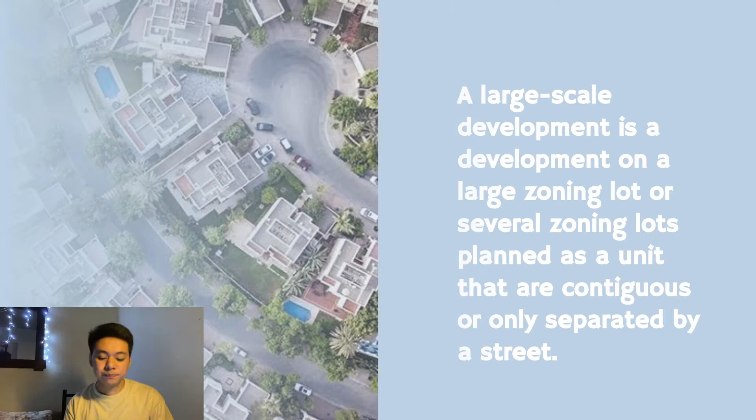Next, architects can be tasked with providing low-cost, durable housing options to people of the lowest income groups, so that slum areas can be redeveloped, keeping the genuine interest of existing occupants in mind, and not based on decrees issued by city authorities.

This means that as an architect, we are not just bound to create beautiful sceneries or greeneries, because we must also consider those people who are vulnerable in our community, such as those who can't even afford to buy a decent house. So large-scale housing also considers those people who are vulnerable in our community.

First is remote areas converted into housing and place-making spots. So what does this mean? In each city, there are places that aren't congested—far away areas not near the central district. We need to utilize these spaces for potential large-scale housing and place-making spots for a new central area, since in a city there are a lot of dead spaces.

For example, here in Cagayan de Oro City, places like Canitoan, Taguanao, and Upper Lumbia are far from the centro but aren't that useful. These areas have lots of free space with potential to be developed, but people tend not to live there because it's too far, not accessible, or convenient for them.

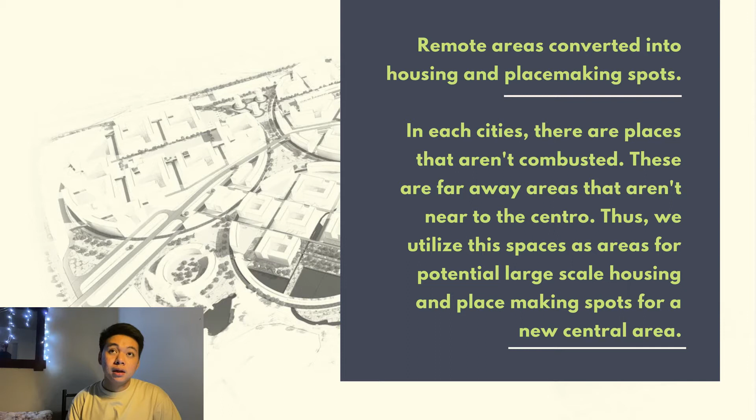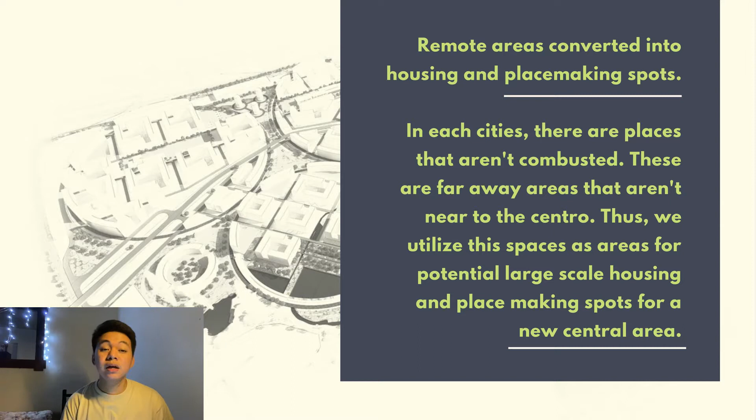So in this new strategy, we convert these areas into newer place-making spots. What are place-making spots? There is connectivity inside a community—we put commercial, residential, office, and business into one area so people don't just focus on one central point in the city, but scatter it all around. For example, in Lumbia, we put a shopping mall for people to invest in that place, because we get high density in one area here in Cagayan de Oro City.

Next is large-scale housing, new doors for new citizens through placemaking. What does this mean? An influx of population is now rising towards urban areas because of new opportunities. These large-scale areas might be the answer to a new style of living. In a large-scale community, placemaking is applied for people to earn, play the economy, and trade, with an exchange of goods and cost within the small community, making it effective.

So what I said earlier is that we utilize these remote areas as new place-making hotspots and convert them into new central points of the city—not just for citizens to focus on the old central spot, but to scatter it around and gain new opportunities, for example a mall placed in Lumbia or Taguanao, so these dead spaces become useful since they have lots of potential for large-scale housing.

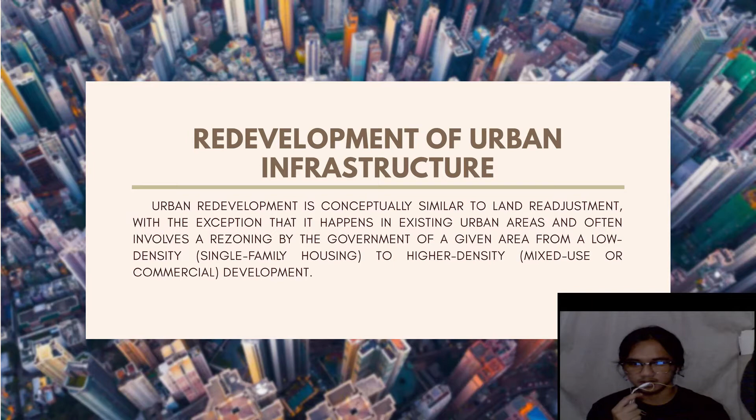Problem 2: Redevelopment of urban infrastructure. What is redevelopment of urban infrastructure? Urban redevelopment is conceptually similar to land readjustment, except it happens in existing urban areas and often involves rezoning by the government from low-density single-family housing to higher-density mixed-use or commercial development. Comprehensively systematized measures for urban redevelopment on a long-term basis aim to ensure fair guidance and planned promotion of redevelopment.

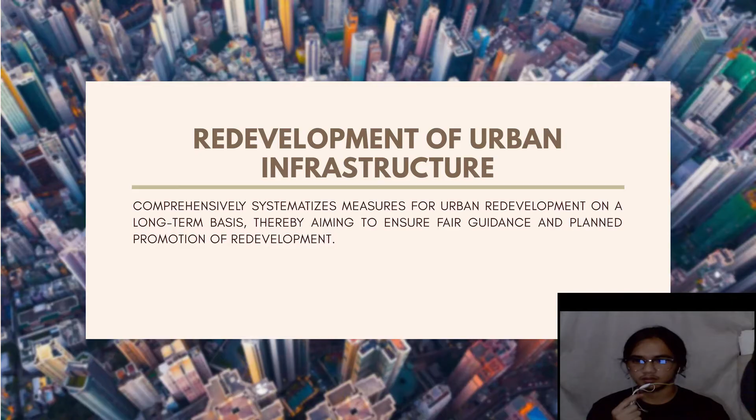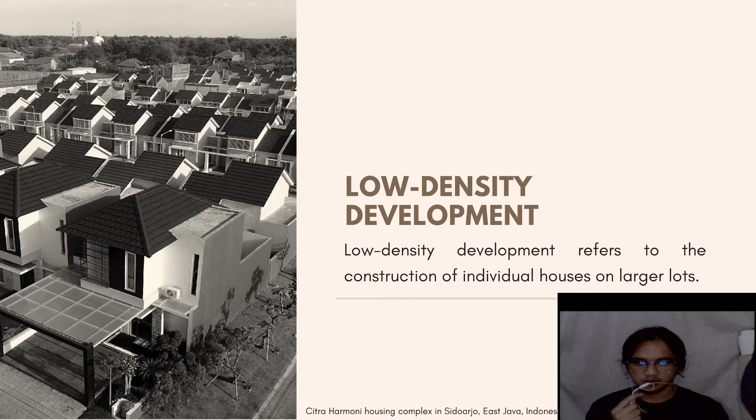What is low-density development? It refers to the construction of urban individual houses on larger lots. What is high-density development? It means new residential and commercial development at a density higher than typically found in an existing community. What is urban sprawl? It is the unrestricted growth in many urban areas of housing, commercial development, and roads over large expanses of land with little concern for urban planning.

What are urban infrastructures? Urban infrastructure can be envisioned as an integrated network of four major components: water infrastructure, such as water treatment plants; energy infrastructure, such as power plants that provide electricity; transportation infrastructure, such as airports and bus terminals; and the land use pattern or urban form, which are cities and other communities.

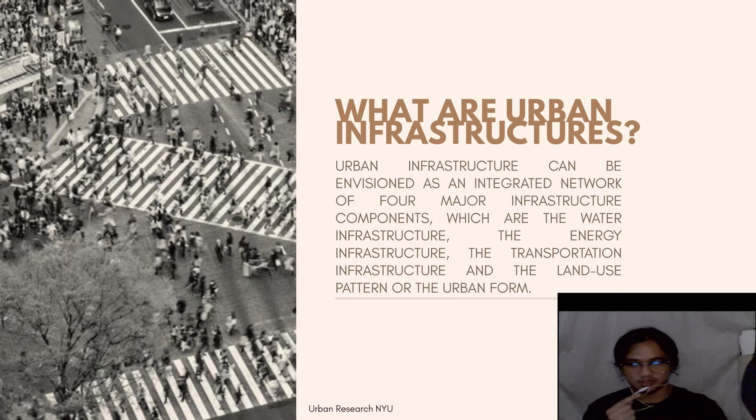Challenges with urban infrastructure: there are numerous challenges that rise within a community in urban areas, including population concentration and urban sprawl, water sanitation and transport, housing in slums, increase in crime, rising cost of living and wealth inequality, environmental pollution and degradation, and sustainable improvement of physical life quality.

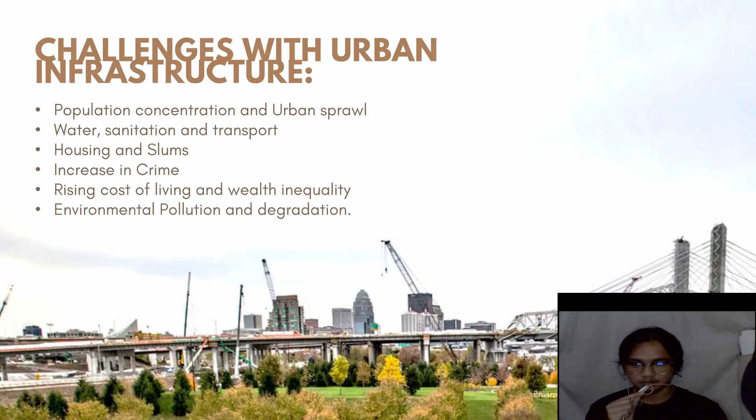The third problem that architects can solve or must solve is to reduce the large-scale production of greenhouse gases. I am Libon Francis Lian, and I'll be the one reporting.

So there are 5 key ways to reduce greenhouse gas emissions in building construction. First is to implement efficiency in material design. Second is to reuse building materials and components. Third is to enhance existing building utilizations. Fourth is to switch high-emission materials to sustainable timber. The last one is to use low-carbon cement.

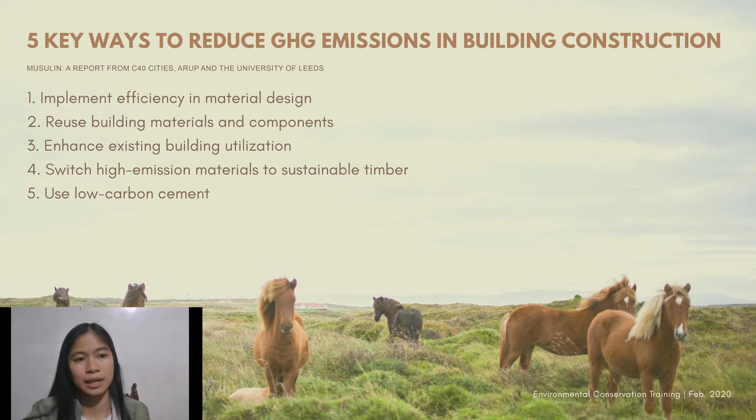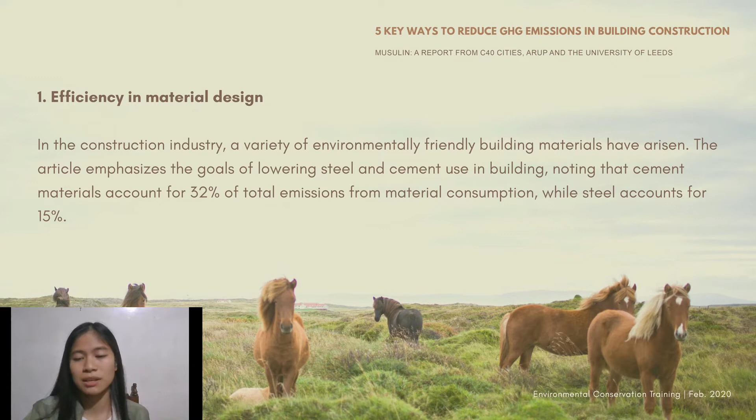Efficiency in material design. In the construction industry, a variety of environmentally friendly building materials have arisen. The article emphasizes the goals of lowering steel and cement used in building, noting that cement materials account for 32% of total emissions from material consumption, while steel accounts for 15%.

The reuse of building materials and components. The long-term climatic benefits of recycling and lowering construction components, like virgin steel, could reduce greenhouse gas emissions by 3% between 2017 up to 2050.

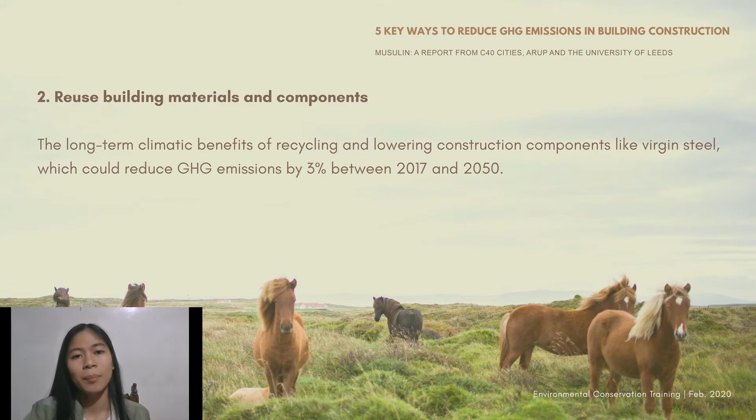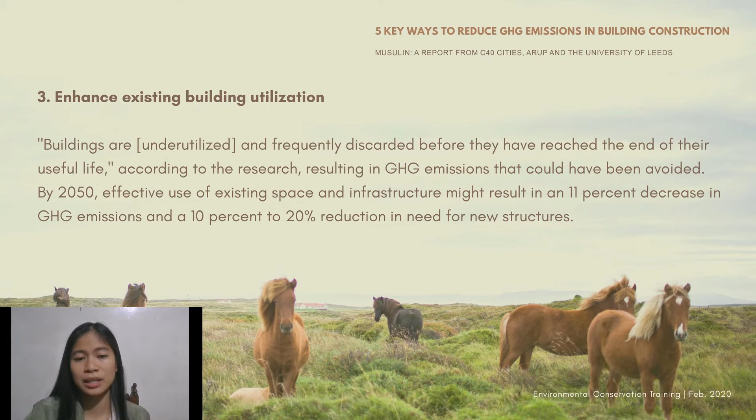The third one is to enhance existing building utilization. So, probably buildings are underutilized and frequently discarded before they have reached the end of their useful life. According to the research, this results in greenhouse gas emissions that could have been avoided. By 2050, effective use of existing space and infrastructure might result in an 11% decrease in greenhouse gas emissions, and a 10% to 20% reduction in need for new structures.

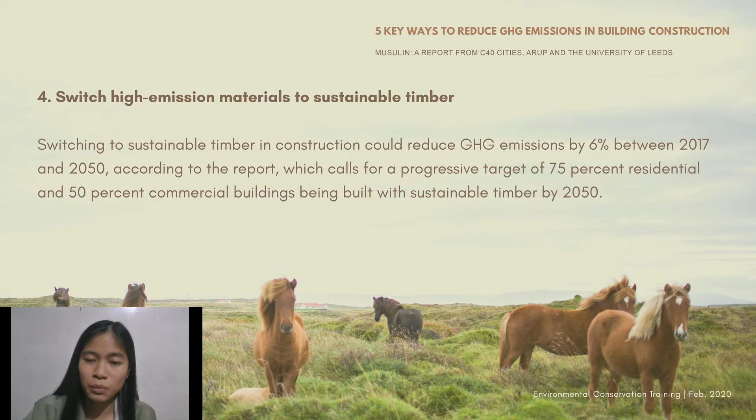The fourth one is to switch high-emission materials to sustainable timber. Switching to sustainable timber in construction could reduce GHG emissions by 6% between 2017 and 2050. According to the report, which calls for a progressive target of 75% residential and 50% commercial buildings being built with sustainable timber by 2050.

The last one is the usage of low-carbon cement. We know that concrete is one of the most carbon-intensive construction materials since the cement component demands tremendous heat and emits a significant amount of carbon dioxide. According to the paper, between 2017 and 2050, utilizing low-carbon alternatives to typical cement could reduce greenhouse gas emissions by 6%.

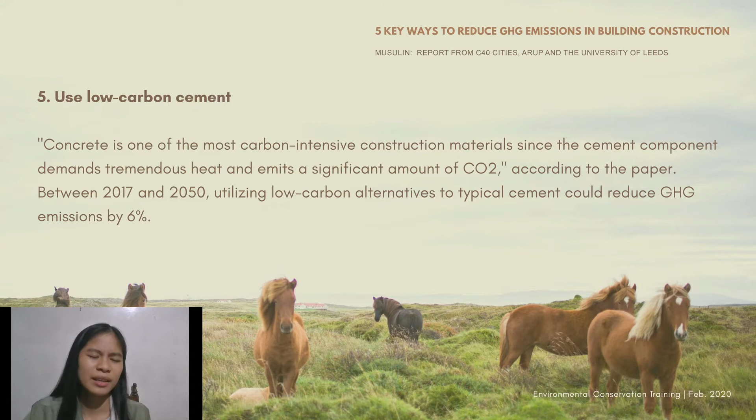So, one of the major contributors to global warming is artificial ventilation. Architects must take the lead in explaining to their clients the advantages of employing indigenous materials and also using vernacular design ideas in order for their buildings to have more favorable influence on the health of their users and also to the environment. So here's 8 tips to reduce your building carbon footprint.

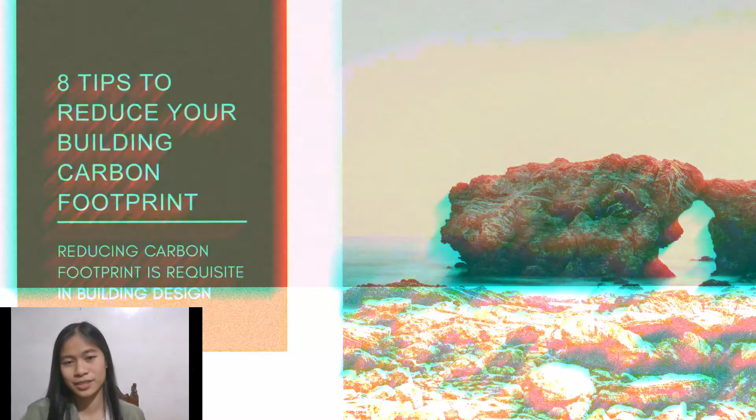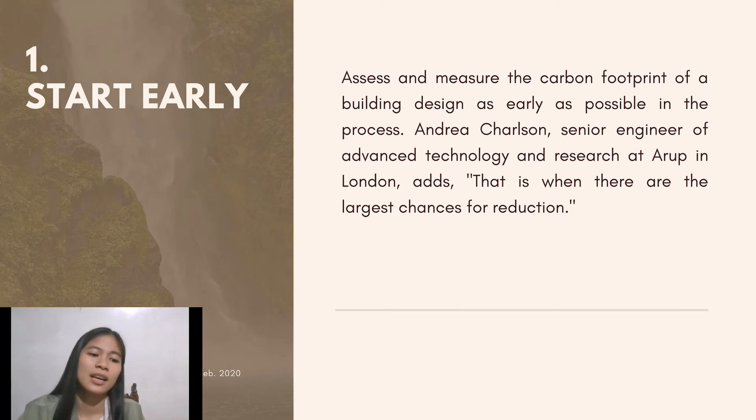Reducing carbon footprint is also requisite in building design. Number 1, start early. You must assess and measure the carbon footprint of your building design as early as possible in the process. As Andrea Charlson, Senior Engineer of Advanced Technology and Research at Arup in London, adds, that is when there are the largest chances of reduction for GHG emissions.

Second is HVAC. Schedule heating and cooling systems to turn on at predetermined times. Depending on the season, let the system run hotter or cooler during off hours. Sensors can be installed in a building to measure indoor air quality and determine how much ventilation is required. This will make your HVAC system use less power and natural gas. It will lower your energy bills and lower the building's carbon footprint.

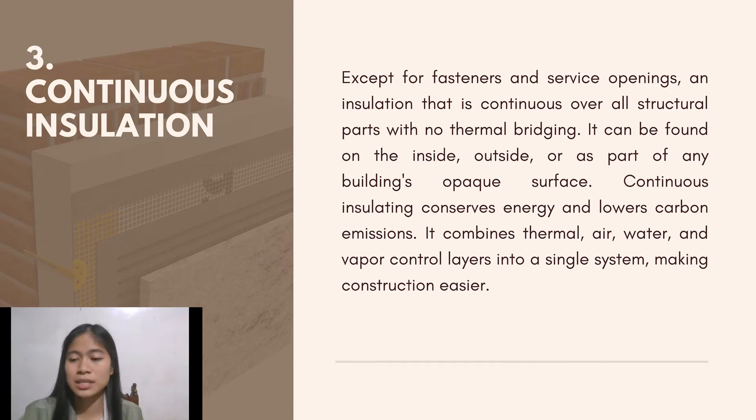Third is continuous insulation. Except for fasteners and service openings, it's an insulation that is continuous over all structural parts with no thermal bridging. It can be found on the inside, outside, or as part of any building's opaque surface. Continuous insulation conserves energy and lowers carbon emissions. It combines thermal, air, water, and vapor control layers into a single system, making construction easier.

Fourth is lighting. Make use of cutting-edge lighting and make the most of natural light. In a typical commercial facility, lighting accounts for over 40% of the energy consumed. Solar control window films can reduce carbon footprints by up to 30% by lowering energy costs. Open-plan offices and light-colored interior finishes aid in the distribution of daylight throughout the structure.

Increase natural light with high-performance curtain wall systems that include integrated sunshades and light shelves. Daylighting solutions that are properly implemented can minimize HVAC peak loads, resulting in lower mechanical equipment capacity and a lower carbon footprint.

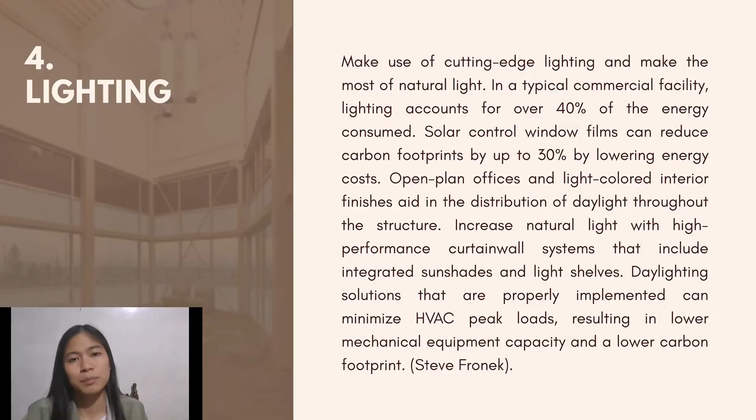6. Water usage. Water usage can be reduced by using water-saving fixtures and appliances. When compared to traditional toilets, specify high-efficiency toilets with lower average flush volumes. Rainwater can be used as a valuable water source. Design buildings to collect rainwater and generate outdoor spaces that are mostly irrigated by rain.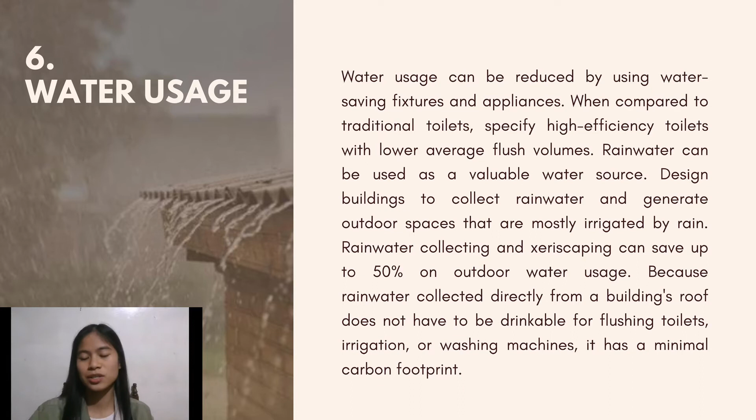Rainwater collecting and xeriscaping can save up to 50% on outdoor water usage. Because rainwater collected directly from a building's roof does not have to be drinkable for flushing toilets, irrigation, or washing machines, it has a minimal carbon footprint.

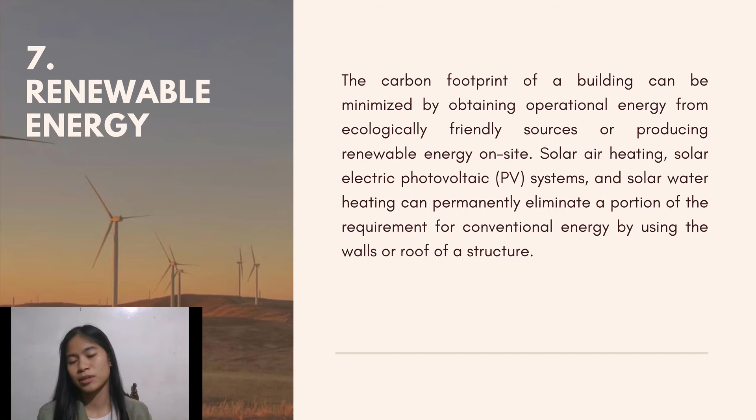Renewable energy: the carbon footprint of a building can be minimized by obtaining operational energy from ecologically friendly sources or producing renewable energy on site. Solar air heating, solar electric photovoltaic or PV systems, and solar water heating can permanently eliminate a portion of the requirement for conventional energy by using the walls or roof of a structure.

Location: the location of a building has an impact on its carbon footprint and the possibility for carbon buildup in the environment. Is the structure surrounded by a deteriorated or pristine ecosystem? Is it possible to repair an ecosystem while building a structure? The building's carbon footprint is also reduced by its location near public transportation.

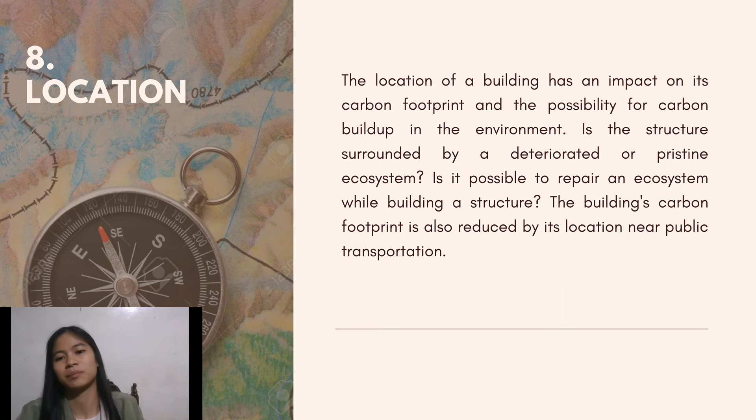So that would be all.

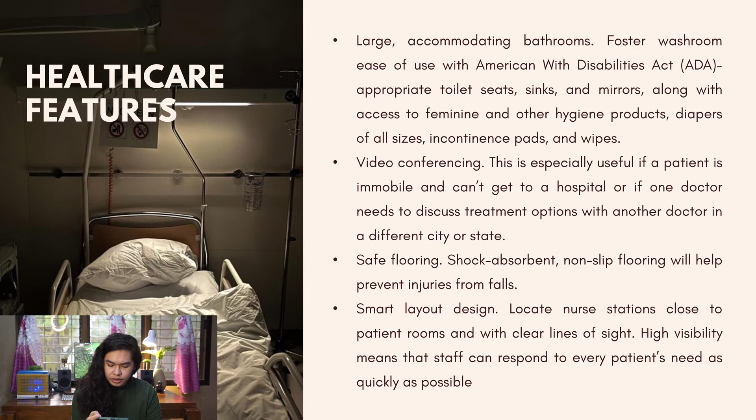Next, video conferencing: this is especially useful when the patient is immobile and can't get to a hospital, or if one doctor needs to discuss treatment options with another doctor in a different city or state. Next, safe flooring: shock absorbent, non-slip flooring will help prevent injuries from falls. Lastly, smart layout design: locate nurse stations close to patient rooms and with clear line of sight. High visibility means that staff can respond to every patient's need as quickly as possible.

Civic: in designing a civic sector, architects have to consider the needs of every demographic. Here are a few civic facilities for which all-inclusive design delivers services your community relies on every day. All-inclusive civic design features, first:

Courthouses: digital maps at the front entrance may help visitors easily find and navigate courtrooms and offices. Other features such as soft landscaping, curvilinear paths, and windows that provide daylight in corridors will make the building feel more welcoming and less intimidating to visitors. This thoughtful design will also encourage more public use.

Libraries and community centers: the elevators and public computers in every library and community center should respond to both tactile and auditory commands so that everyone can use them. Instruction and navigation guidance should be offered in Braille. Moreover, consider mobile features that can easily rearrange to accommodate wheelchairs. Correctional facilities.

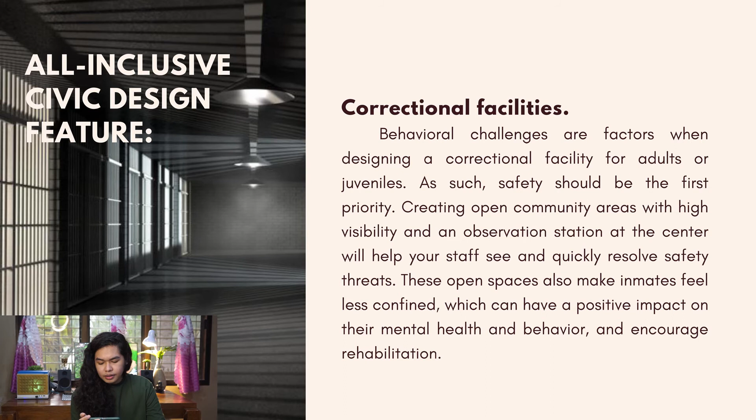Behavioral challenges are factors when designing a correctional facility for adults or juveniles. As such, safety should be the first priority. Creating open community areas with high visibility and an observation station at the center will help your staff see and quickly resolve safety threats. These open areas also make inmates feel less confined, which can have a positive impact on their mental health and behavior.